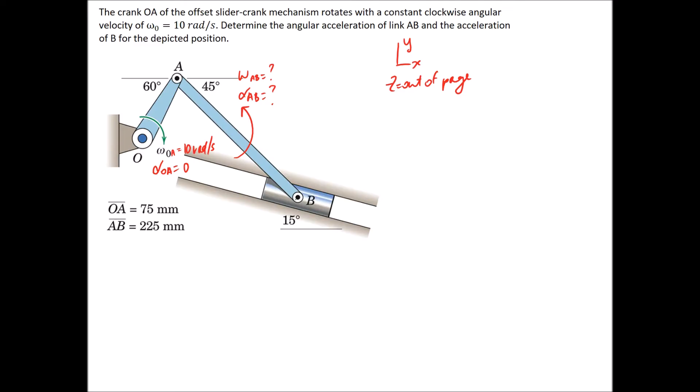Alright, so we can start this off. Remember that we're looking for this angular velocity, and we're looking for the angular acceleration of this link and the acceleration of this point here. But unfortunately, we're going to have to start with the velocity analysis.

We're going to do this so we can find omega AB, because we're going to need it in a second. So I'm going to consider the velocity of A relative to B, and I know it's equal to their difference in absolute velocities. So let's go through and find each of these terms individually.

The velocity of A relative to B, we can calculate from the fact that we have a rigid member joining the two of them. So it's going to be equal to omega for the member, which we called AB, multiplied by their relative radius. And if it's A slash B here, it needs to be A slash B here as well. So the angular velocity of this link is the thing we're trying to find, so I'm just going to write it with a K on the end in vector form. Remember, we've assumed it's the positive direction.

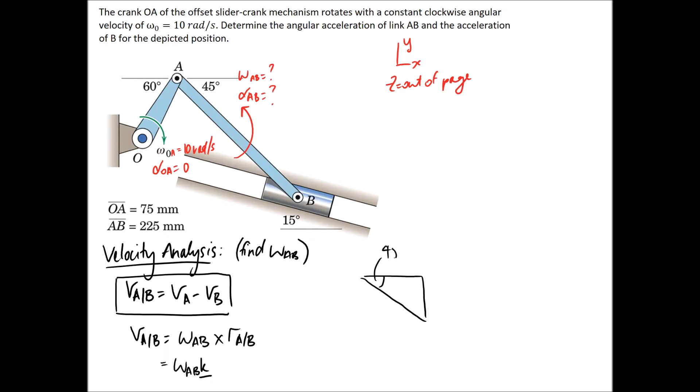And the radius of A relative to B, unfortunately, I think we have to draw a triangle to try and find it. So if we take out the triangle that sits in here, we know it has a 45-degree angle, we know the length of this member is 225. This is point A on the corner, this is point B on the corner. We're looking for the radius of A relative to B, so that means we go from B back to A, so that's the direction of the arrow. But since we want it in terms of X and Y components, we're going to have to do the vector addition of the other two sides to get there.

So the radius of A relative to B is going to be equal to this side, which is 225. The length is going to be the sine component, so sine 45 j, it's going up so it's positive, and this is going in the negative x direction, so it's going to be minus 225 cos 45 i. So if you type that in a calculator, it ends up being simplified to 159.1 j minus 159.1 i for our relative radius.

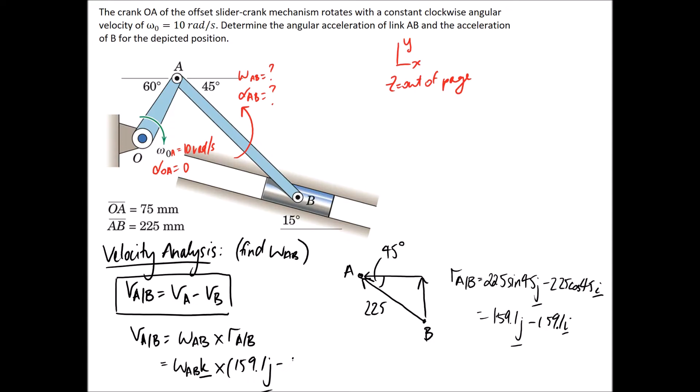So this is what we can substitute in down here. If we multiply out our unit vectors, we end up with this. Alright, so that's the first one of our three terms that we need to look at.

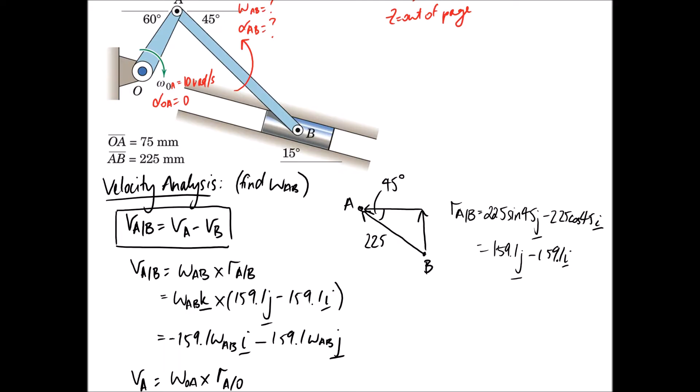So the next one is the velocity of point A. For this one we're going to be able to use the fact that point A is connected back to point O through a member. So its velocity is going to be equal to omega for the member, which we called OA, multiplied by the radius of our point relative to the fixed one, so A relative to O. Now it's just a case of substituting in. We know omega OA is 10 radians per second and it's going in the negative direction, so this is going to be negative 10k.

And the radius of A relative to O, we're going to need to take out a triangle. Again, we can take out just the one that sits in here.

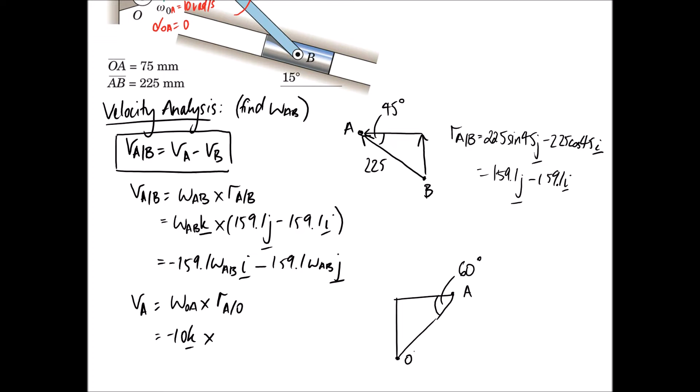So it's going to be like this. We know this is a 60-degree angle, and this is where point A sat and point O sat. And the other piece of information we need is the length of the member, and we're given it: 75 millimeters here. So we can put that in.

So we want the radius of A relative to O, so we need to start at O and draw our arrow back to A. But since we want it in X and Y components, it's going to be the vector addition of those two sides.

So the radius of A relative to O is going to be equal to this side, which is 75 sine 60 J, and then this side is going to be the cosine one. They're both positive because they're going in the positive Y and the positive X directions. So this simplifies to be 65 J plus 37.5 I.

So this is what we're going to put in over here. Alright, so now we just need to multiply out our unit vectors again, and this simplifies down to be that.

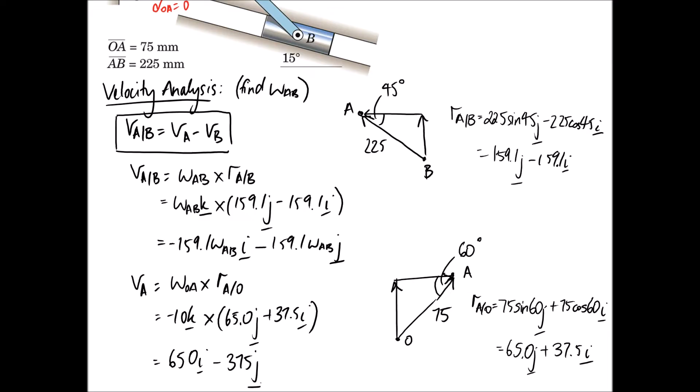Alright, so we have one thing left that we need to determine, which is the velocity of point B. And for this one, we're going to use the fact that point B is attached and able to move within the slot. That means, if it's only able to move within the slot, the direction of its velocity is either going to be up or down the slot.

I'm going to assume down, but it doesn't matter. If it comes out negative, you know it's the other way. So I'm going to call this the velocity of point B.

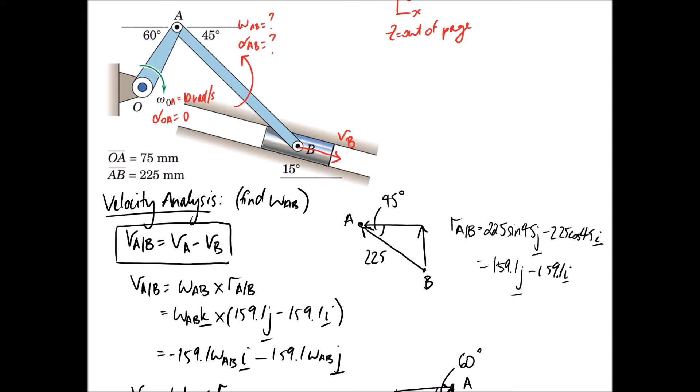And when we put it in vector form, we're just going to consider the fact it has a 15-degree angle in there to put it in X and Y. So if we draw the little triangle that sits in here, we've said this is the direction of VB. We knew it had a 15-degree angle due to the slot. So in vector form, we just need to work out these X and Y sides of the triangle.

So it's going to be VB sine 15 J for this side, and it's pointing down, so it's going to get a negative in front. And this is pointing in the positive X direction, so it's going to be VB cos 15 I.

Alright, so now we're back to being able to substitute our three things into our equation. Remembering that the velocity of A relative to B is equal to the velocity of A minus the velocity of B. So it's going to become, oops, it's a negative.

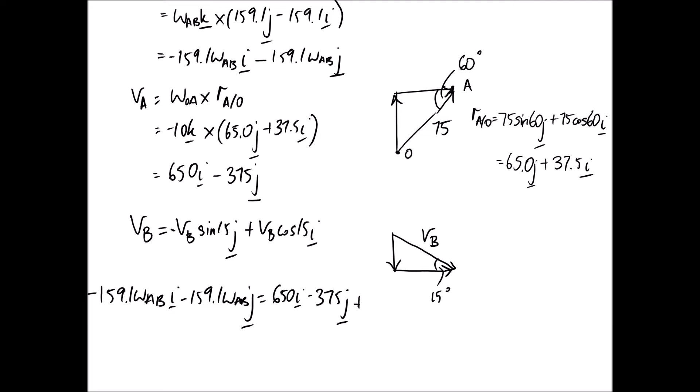Alright, now this is getting taken away, so all the signs are going to flip. Alright, so this becomes the equation that we need to solve.

And remember that we have the ability to split this into I and J components, or two equations of I and J components to solve for our unknowns. And we have two in this case, but we're only really interested in solving for that angular velocity.

Unfortunately, this time we end up with I and J components tied up in both of the unknowns. So VB has both I's and J's with it, and omega has I's and J's with it. So it becomes a case of real simultaneous equations.

So anyway, let's start with the I's. So we're going to get the following. Alright, so that's the I's for the equation. And if we take out the J's...

Alright, so here we have equation 1 and equation 2 that need to be solved simultaneously. And this one we can solve a little bit easier by saying that both of the left-hand sides of these are identical. So that's going to mean equation 1 can be directly equated to equation 2 by just saying these are equal, which means the right-hand sides have to be equal as well.

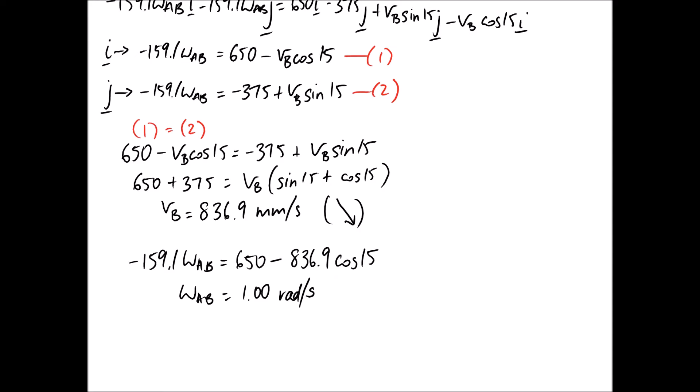That means it was the correct direction when we assumed it, which was positive. So it's going to be anti-clockwise.

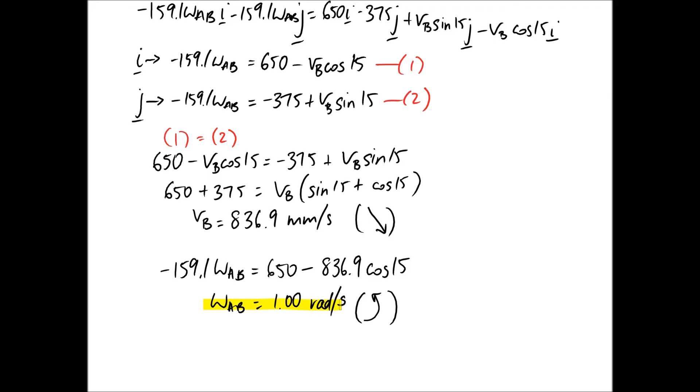Alright, so we went through all of this so we could find omega AB. Now that we know it, we're going to be able to do the acceleration analysis, which should give us the two things we were actually looking to answer this question with, which was the angular acceleration of this bar here, and also the actual acceleration of this point on the end.

So it's basically going to be a case of following this whole thing through again, except instead of looking at the velocity, we're going to be looking at the acceleration. So let's give this a go.

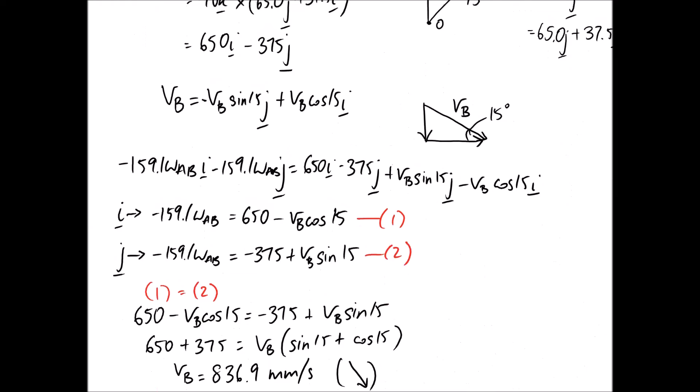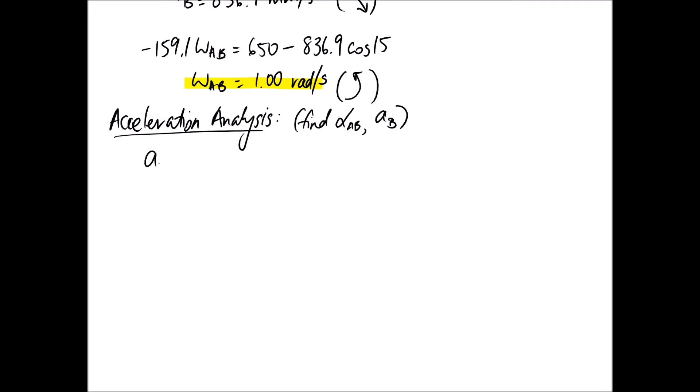So this time we're finding the two things to answer the question, which is alpha AB and the acceleration of point B. So our starting point is to look at the relative acceleration that happens between A and B instead of the velocity this time. We're going to go through and find each of these individually again.

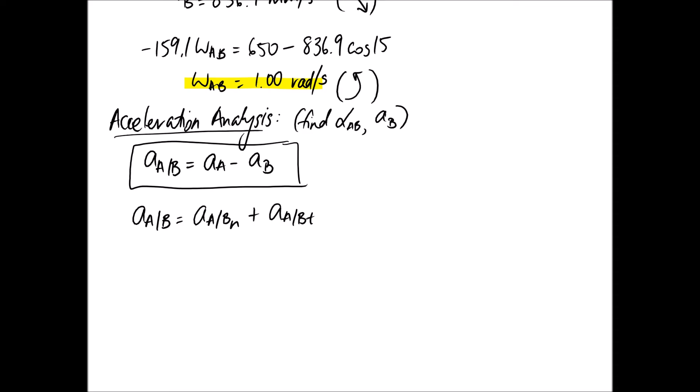So if we start with the acceleration of A relative to B, we know that they were connected by a rigid member. So it's rotating that member, so we're going to need to consider the normal and the tangential component of that acceleration. So if I just scroll back up, we're looking for what's happening between A and B.

So between A and B here, we know we have an angular velocity, omega AB, that we just worked out, and an angular acceleration of alpha AB that we're trying to find.

So when we write this out, the normal component is going to be omega for the member, which was AB, multiplied by the relative radius, which is going to be A relative to B, again, since it's that form in the equation. And then this is going to be alpha for the member, which was AB, same radius.

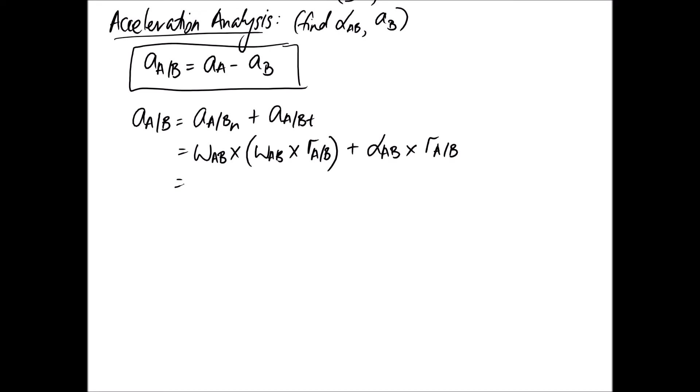Alright, so substituting in, omega AB is what we just solved for. We just worked it out to be 1 radian per second, and it was anti-clockwise, which is the positive direction. So let's just sub this in as 1k.

And for these bracketed parts, you can often, if you've done the velocity analysis first, you should be able to go and find it in your velocity analysis.

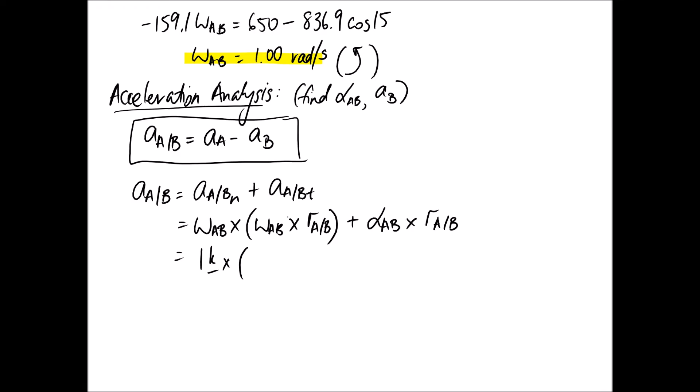So if we scroll back up, we're going to be looking for omega AB crossed with r of a slash b. Let me try and find it. Here we go, so it's this here.

Alright, so if you want, you can kind of take what you've already simplified it down to. We now know omega AB is equal to 1, so it's basically going to be negative 159I, negative 159J. So let's put that in.

I'll just put the 1 in here. Alright, so that's what that ends up being.

Alright, alpha AB is what we were trying to determine, and we drew it in the positive direction, so it just gets a K on the end.

And we already worked out the radius of A relative to B. When we drew the triangles, we found it to be 159.1J, and minus 159.1I.

Alright, so then it just becomes a case of expanding all of this out, and when you do that you get the following result.

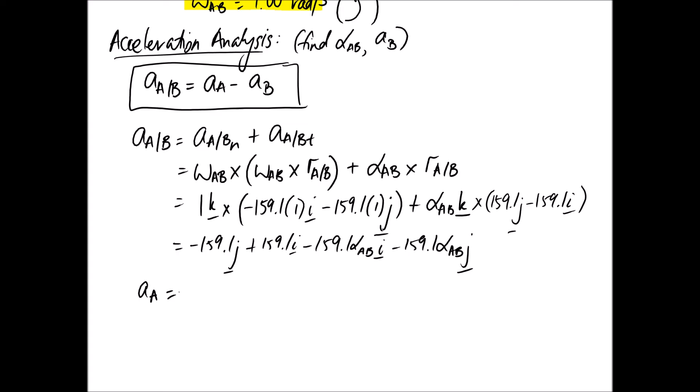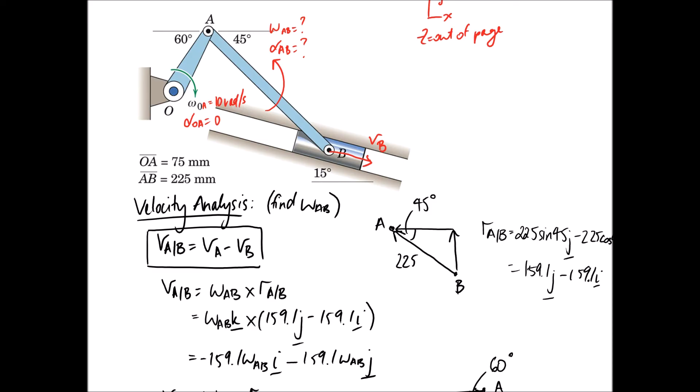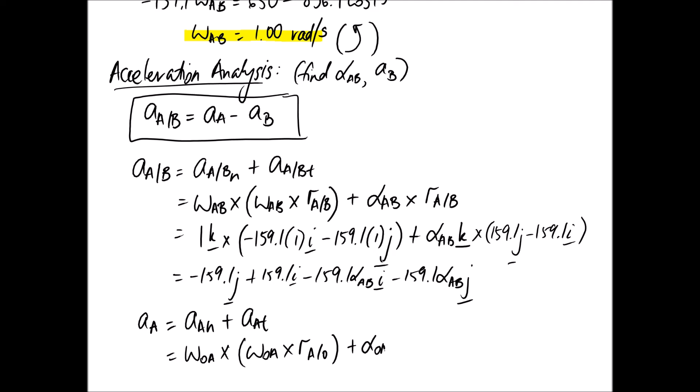So next up we have the acceleration of point A. Going to use the same technique as before: point A was joined back to the fixed point at O, so that's what we're going to use to solve it. It's going to become the normal plus the tangential component of that rotation, and it's omega OA, the angular velocity of the member. The radius is still A relative to O, the fixed point. This is OA and RA/O as well.

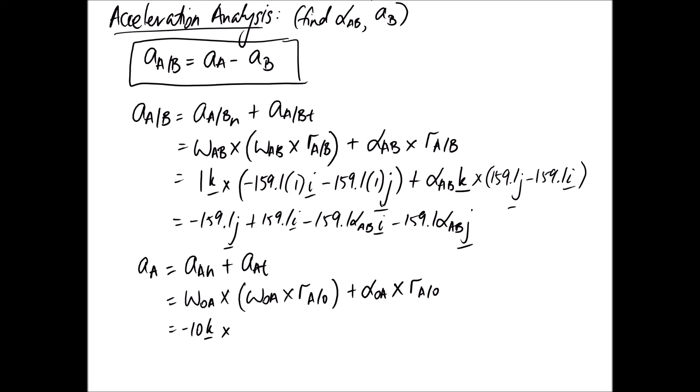Substituting in here, omega OA before was given as 10 radians per second clockwise, so it goes in as negative 10. Again, we should be able to find where we solved for this bracket in the velocity analysis, looking for omega OA multiplied by RA/O.

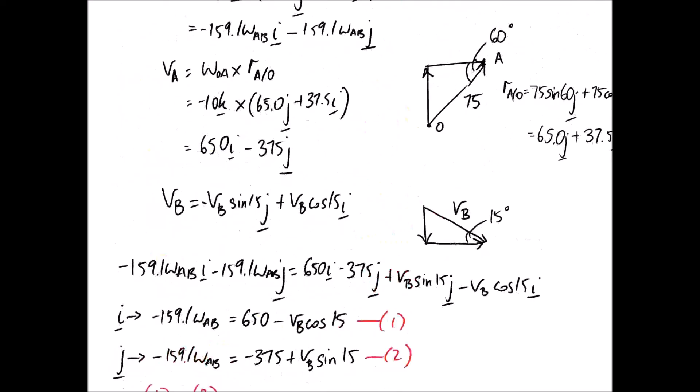We've already simplified this down to be 650I take 375J, so let's shortcut it and put that in. The other part of this is alpha OA multiplied by the radius, and if we scroll back up we can see alpha OA is going to be 0 since we had constant angular velocity, so we don't have to do anything with this part - it just goes away. Simplifying this down, it just becomes this.

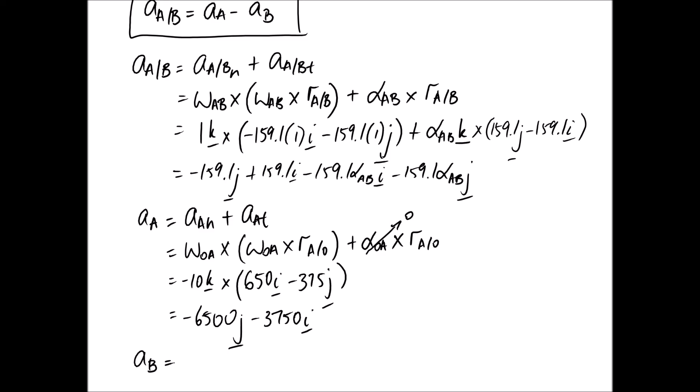So we only have one left, and that is the acceleration of point B. Again, we can use the trick that it's only able to move within the slot, so that means the direction of the acceleration vector can only be in the direction of the slot as well. Last time we assumed VB was going this way, so let's assume the acceleration of B is also going that same direction.

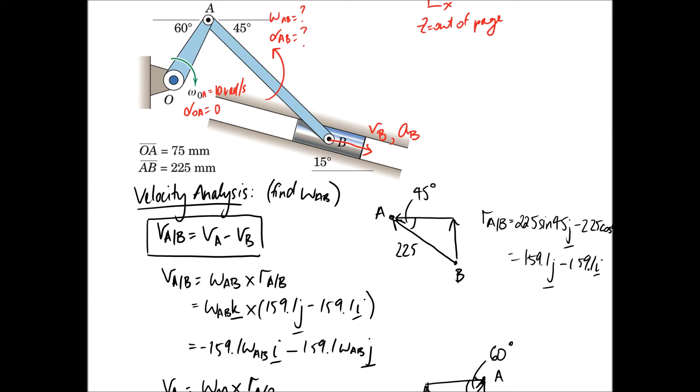That just means we need to put it into vector form using the triangle again. If we draw the triangle, we've said this is the direction of AB. We've got an angle in here of 15 degrees, so we just need to put it into X and Y parts: AB sine 15 negative going down, and AB cos 15I going to the right.

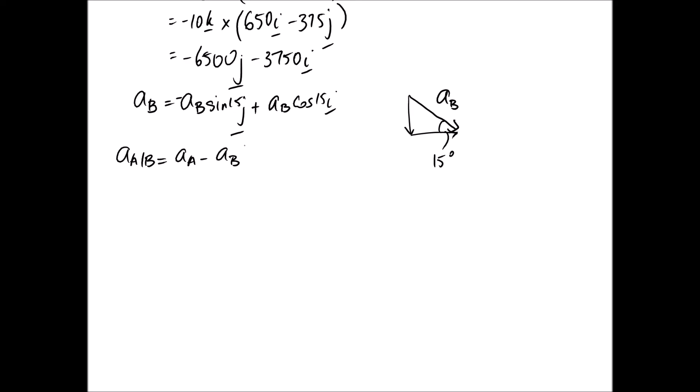Alright, so the final step is just to put it all together. We need to put in our original equation, this one here. So if you substitute in for each of the different things you've simplified down, it becomes...

Sorry, so this goes on to the next line since it's quite long. So we need to go through and find our two unknowns. We have the ability to split this equation into I and J parts again, so that's what we're going to go ahead and do. So on the I side, we end up with...

That equation there, and I'm just going to leave it like that for now. On the J side, we end up with that thing there. Alright, so all that's left is just to rearrange these two equations to substitute into each other. If I go ahead and rearrange for the acceleration AB, I end up with that there. So this becomes equation 1, this becomes equation 2.

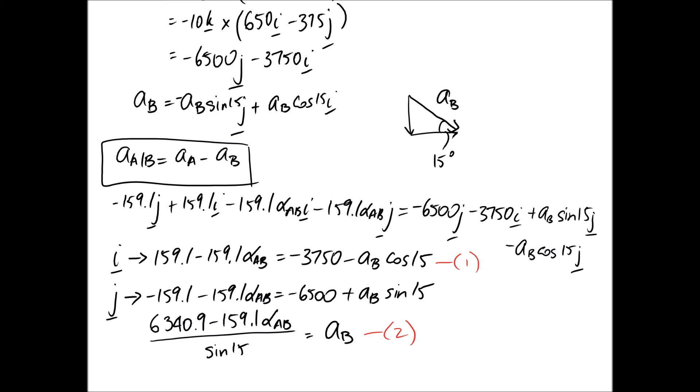So if you sub equation 2 into 1, you can solve.

Okay, so the only unknown there is alpha AB, and if you rearrange for it, you end up with 36.6 radians per second squared. It comes out positive, which tells you it is anti-clockwise as assumed to begin with.

And then substituting back into the equation for AB, the acceleration of point B comes out to be 1986. The units are millimeters per second squared, again because we measured everything in millimeters. It comes out positive as well, which means the direction we assumed is correct - it's going downwards in the slot.

So the final answers for this question are: that's your angular acceleration, and this is the acceleration of point B. So that's all there is.